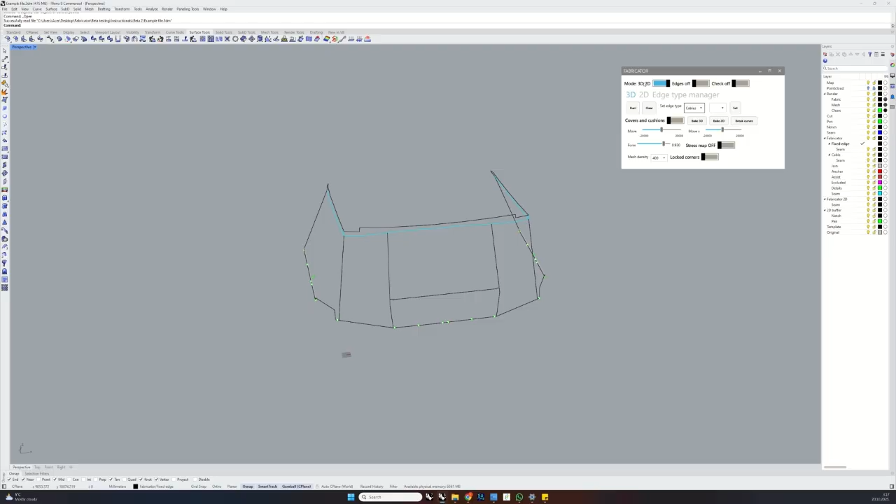Alright everyone, so this is the new mode, the 3D 2D mode. It's by default on. So what this does is it makes you focus on designing only the 3D part first. You will basically focus on building your wireframe, and the constraints of the wireframe will be just that it's completely closed.

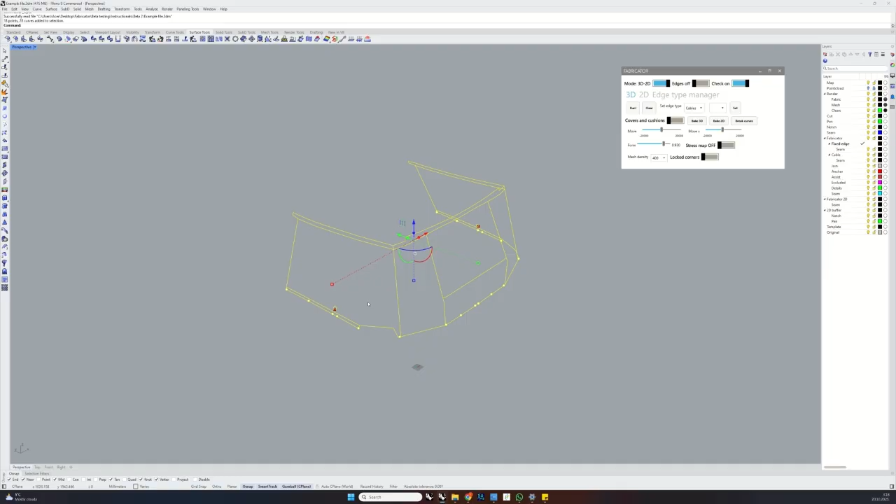So if you have this check on, you can check if it's completely closed. You will see only where a curve is open that it highlights. For this case, it doesn't matter because this is a detail curve. It's the details that are going to be important.

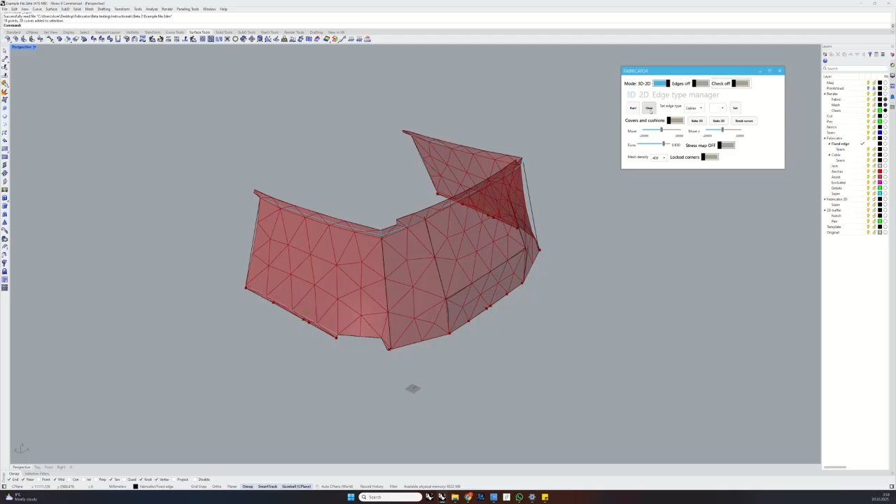When the wireframe is closed, it can be processed. If you run it, you will see that it will run and process immediately the 3D shape. So let's see what kind of edges we have set here.

When you turn this on, you will see the name of every edge - cables, fixed edges, joins, seams. Some are color coded.

In the 3D mode now, we will focus only on the form finding part of the wireframe building - build fixed edges, build cables, seams, join lines.

If you choose fixed edges, when you build with these, it will be just the areas that are not moving at all. So any part that leans onto the boat, the rail, bottom - if you want to keep it snapped on, will be a fixed edge.

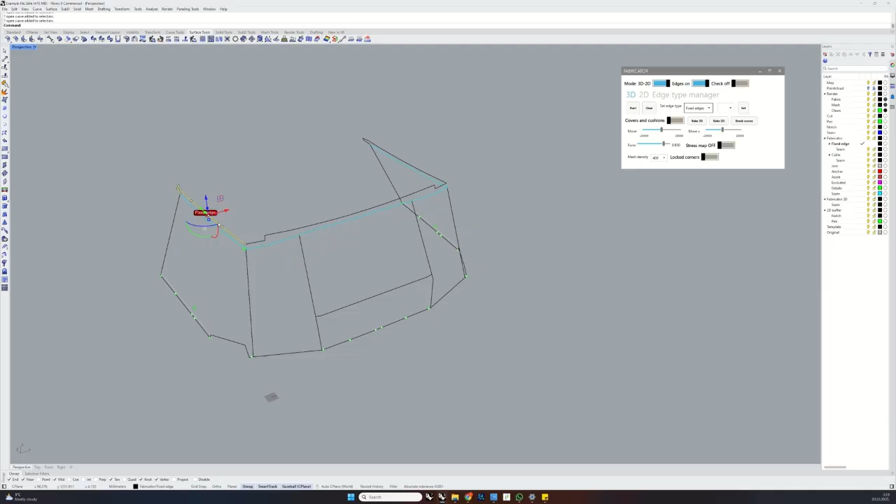The cables are going to be the ones that are in the air, so that you want to deform when the form finding kicks in. So I will usually leave open edges just for you to see this is the model.

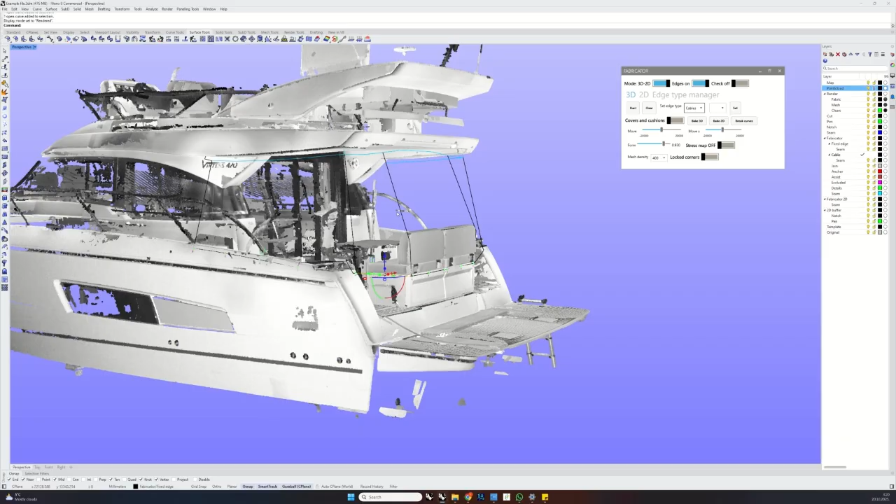These things that are in the air, I'll let them form find. Also here because it's not attaching to the edge of the boat. And also here.

So yeah, when you run it, you will see the shape. And this is basically what you're trying to achieve with the 3D mode - just get the good shape.

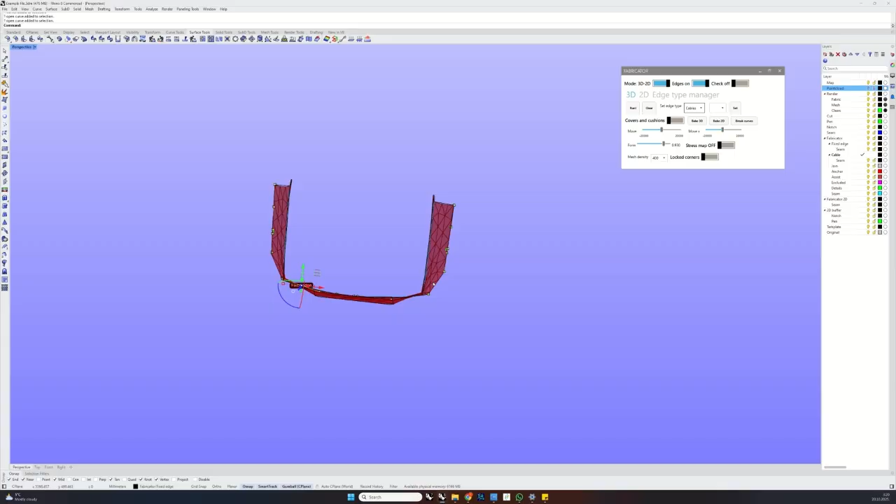The output will always be just regular lines, so seam lines, exact shape of the panel without any seams added, and all the parts that you processed. This one outputs only the panels.

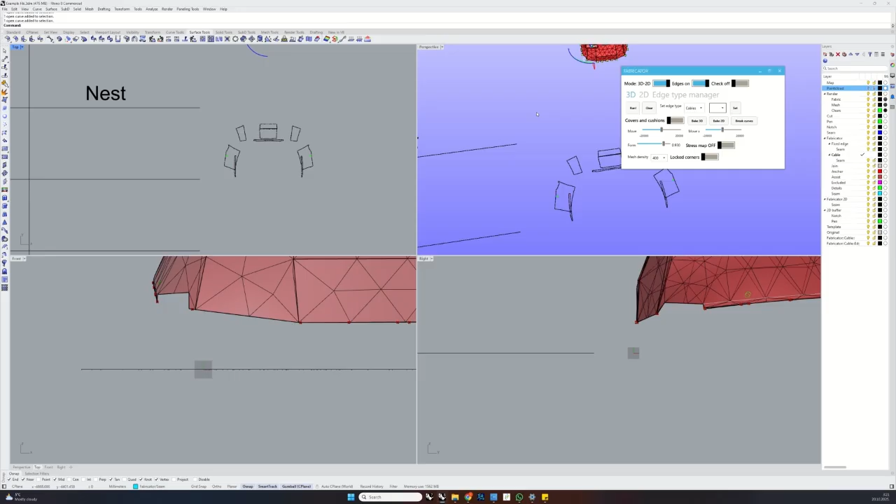So what we'll do now, we're going to take this in 2D. We can also put 3D, doesn't matter. And we'll take these here. You can do it also in a different way.

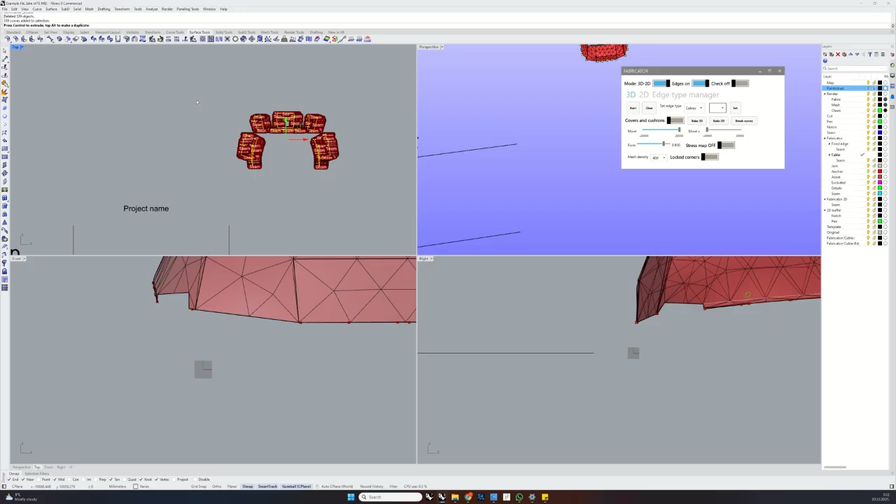We added here the sliders, so you can move where you like and make adjustments. You will notice that no more we can now move freely with geometry, more or less, if this is on.

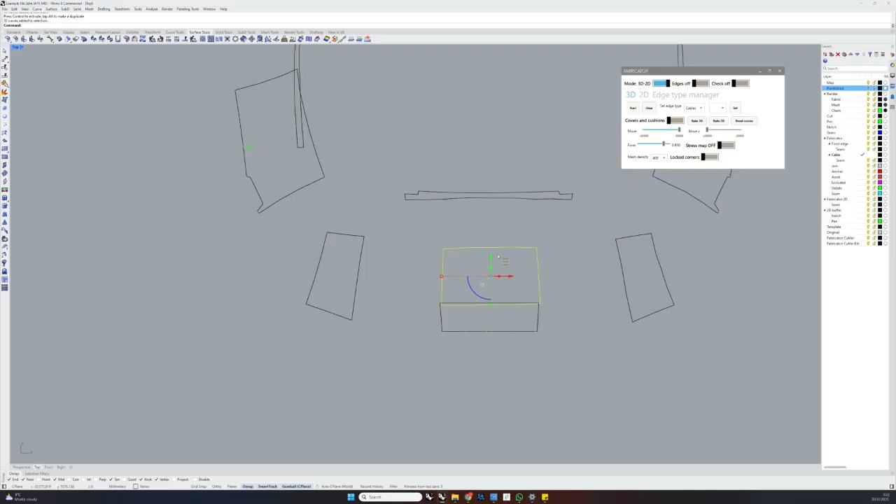Okay, so in the workflow, what do we do next? Now in 2D, you can see that the notches are out, all the parts are out, but there's no numbering, no seams, nothing. So this is now the pure panel sizes, 2D size, flattened to 2D.

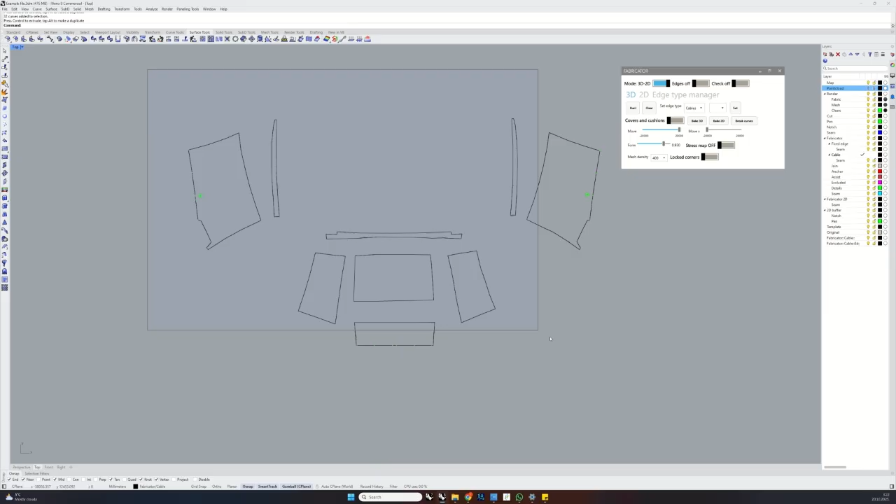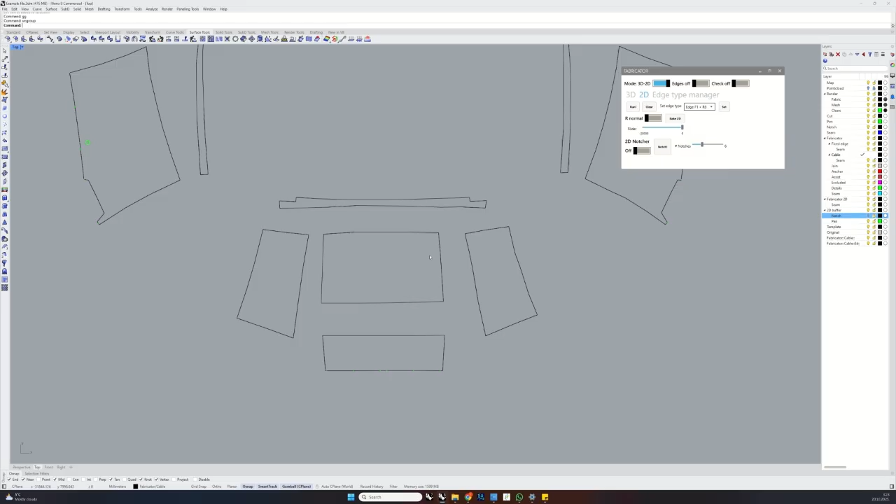So once you settle it, don't move it anymore. Now when you're in this editing, we will choose our edges where we want to reinforce. Let's say 8 centimeter reinforcement. We just find and reset it.

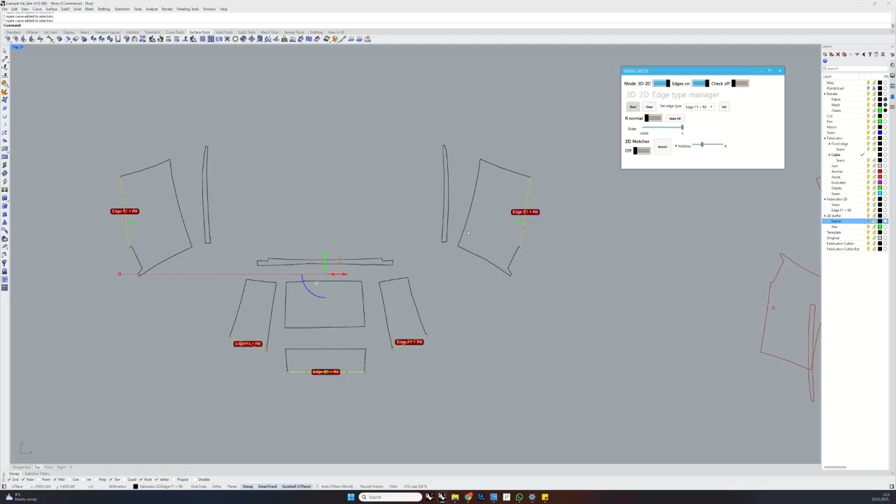Let's just run quickly to see the results. Are we getting them? Yeah, everything is turning out. You see it's adding seams everywhere, numbers and everything. This is not just a preview.

So you can continue editing. Maybe here, here, here, here we will add a zipper. And then this is something that I couldn't do before. I'll make a zipper

with the flap on the other side. You can process it if you needed to do those.

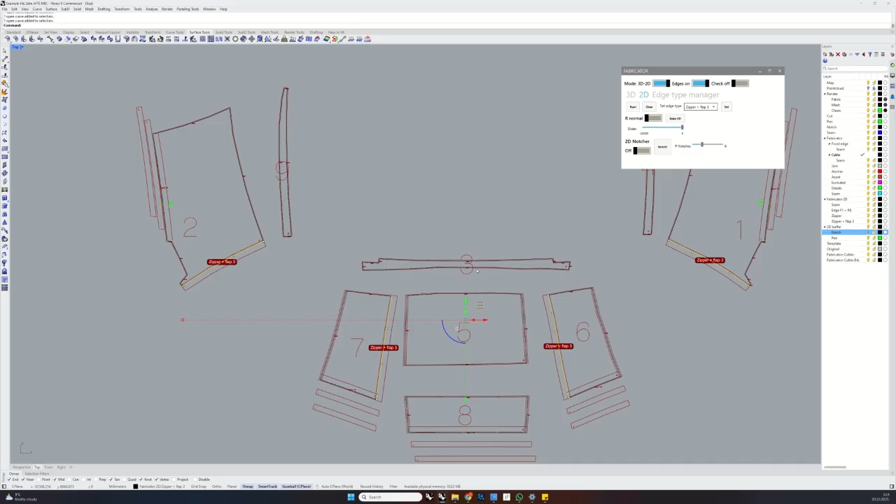And now another thing that you could not do before, and this is here. Now you have the connection of these panels, but of course the zip line needs to be somewhere in there, right? And to get the zip line there, you need to extend these panels. So yeah, tricky problem, but

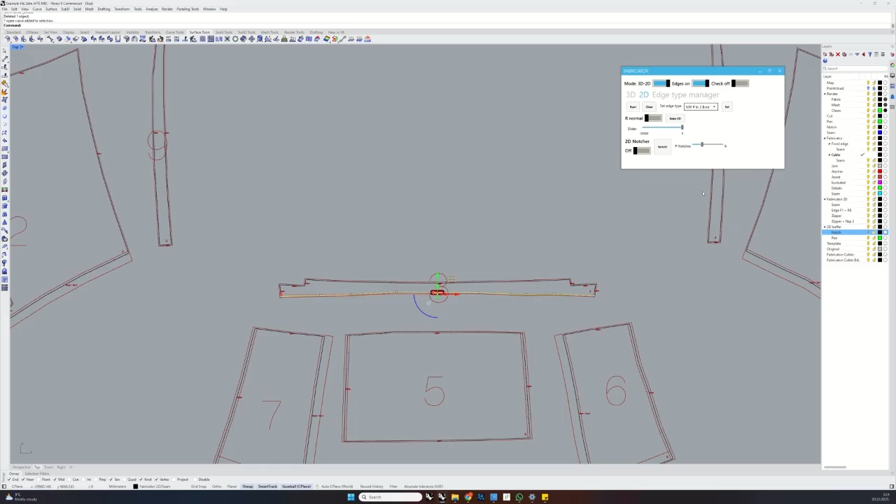this one, let's put it to - I have it here. This one is moving the zip line in. And this one is extending the panels by the same amount. So now we will get the zip line in, extension of the panels.

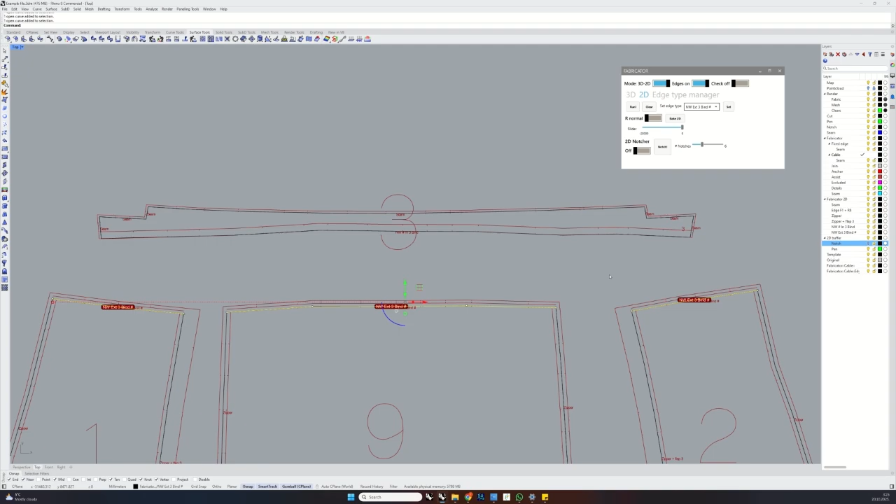And this is with finish that I prefer. This is with folding. And you can, of course, in Edge Type Manager, make it your own. Just follow the principles of moving the line, moving the pen lines, and you can do any kind of combination that you like. You can do the same for these.

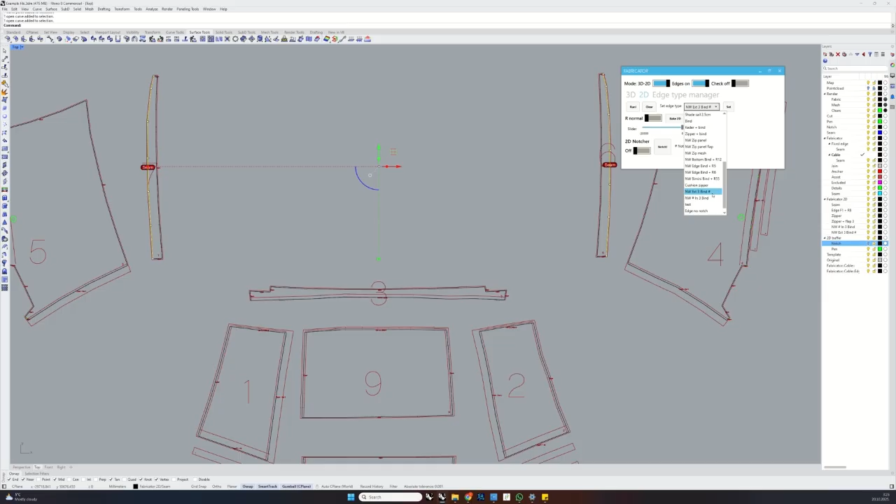What else? This one. Oh, this is one cool thing that we can do. You can join all of these. And when you run, you have a one-piece reinforcement.

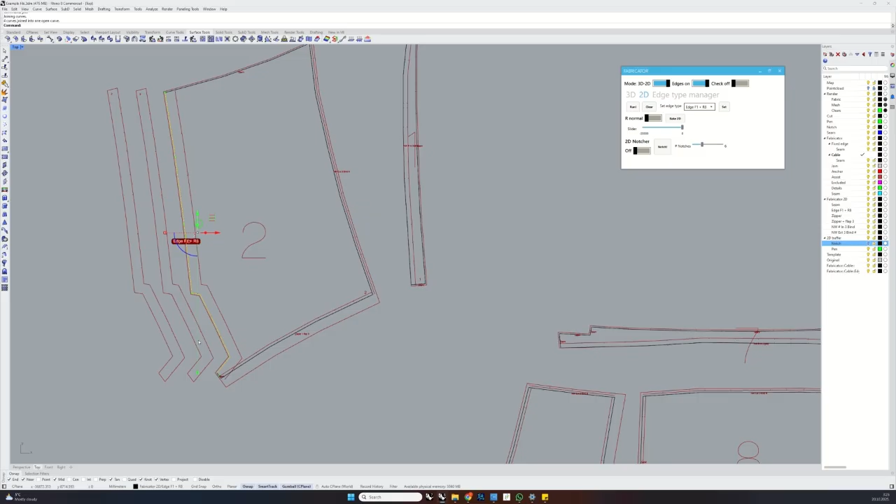This is not just joining and running again, everything will be done automatically. Set it. Select this one. Reinforcement 5.

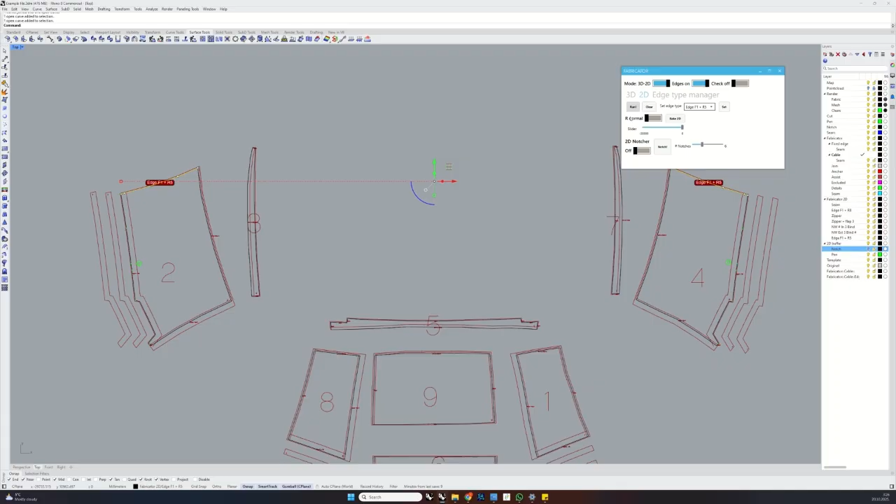Okay, and now we are happy with the pattern. Move it down here and take it. And we have all of our details running.

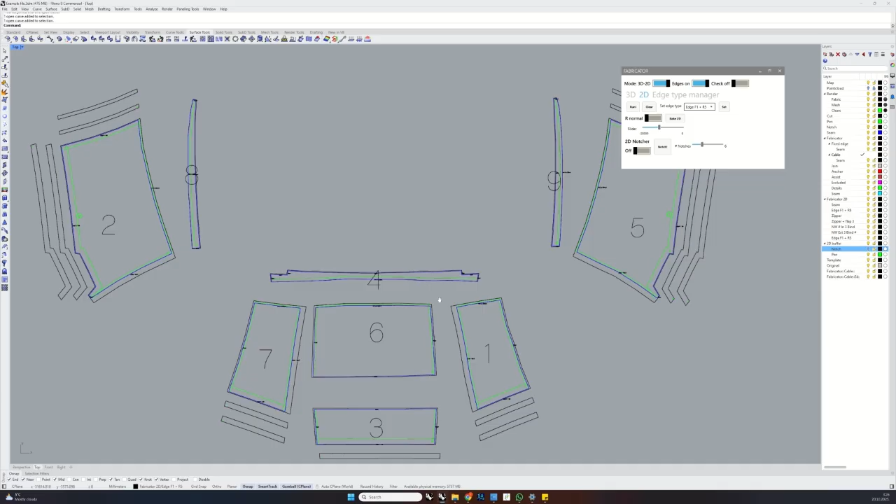Now someone was asking about the windows, but this is now detailed further on. So let's leave this for another video.